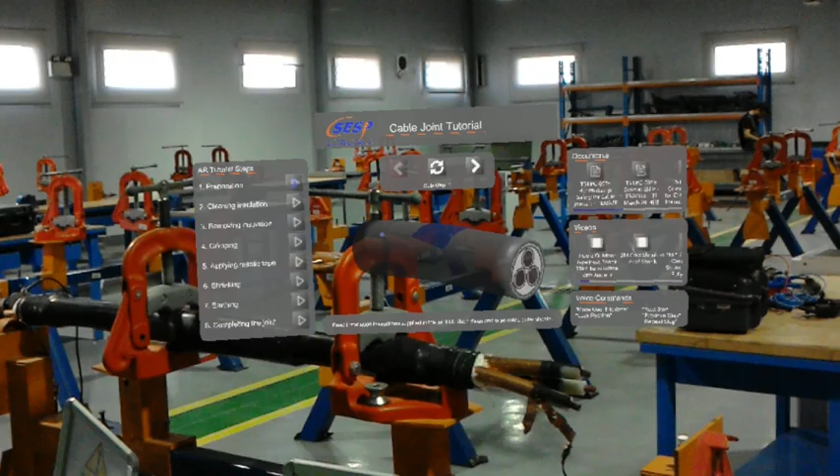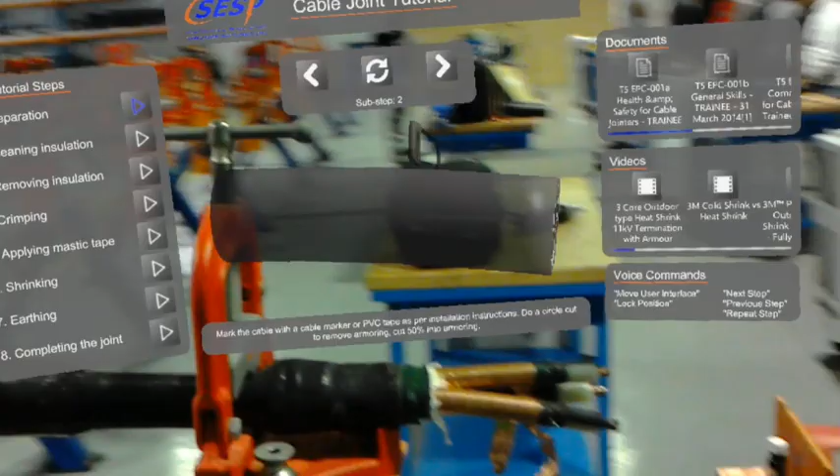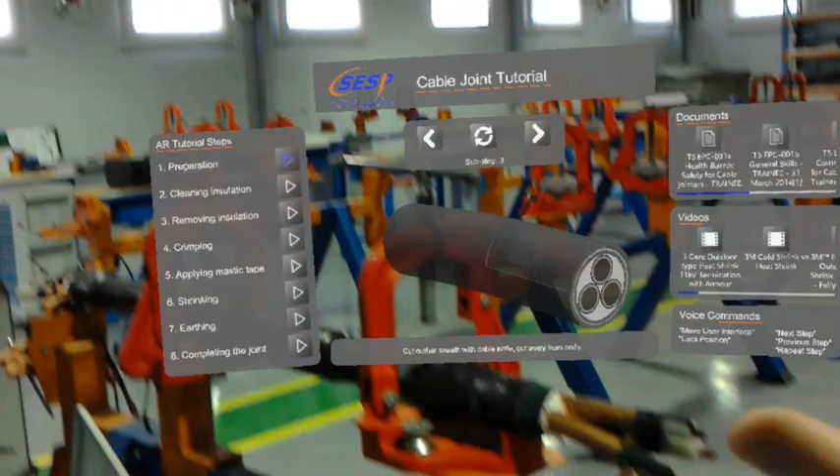Mark the cable with a cable marker or PVC tape as per installation instructions. Do a circle cut to remove armour. Cut outer sheath with cable knife, cut away from body. Remove outer sheath.

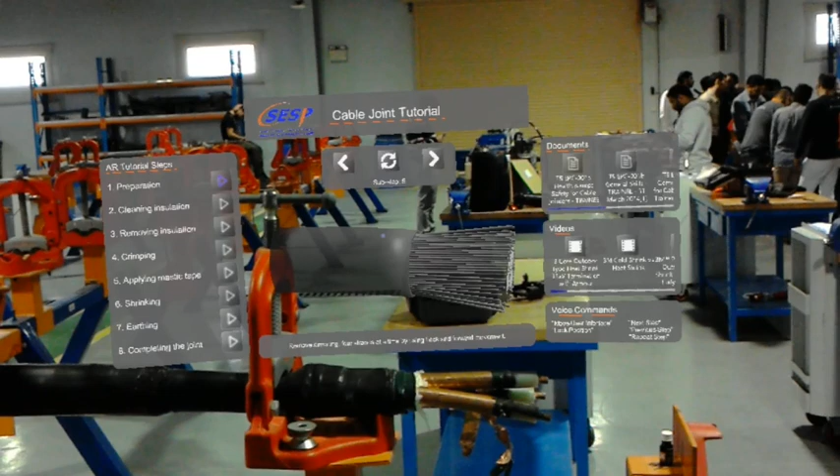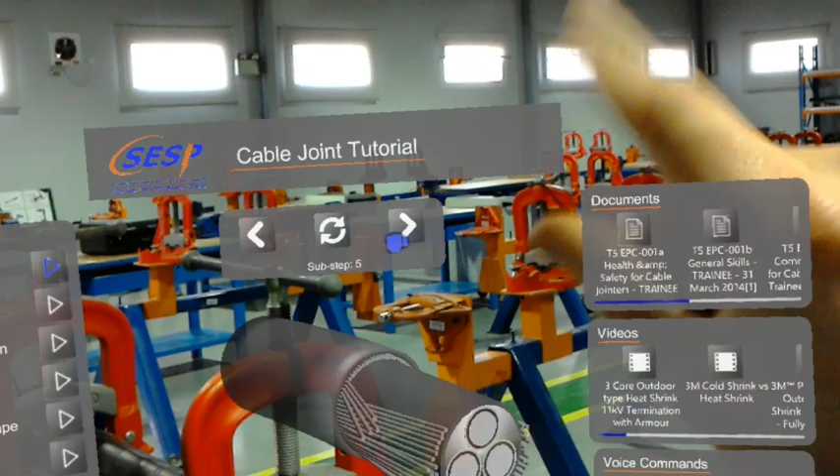Remove armoring, 4 strands at a time by using back and forward movement. According to instructions, mark bedding cutoff. Cut and remove bedding with a cable knife, don't cut too deep. Cut and remove inner bedding.

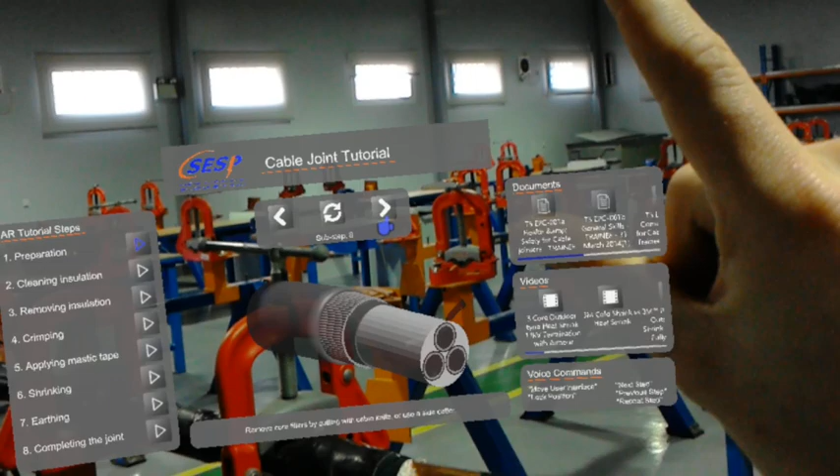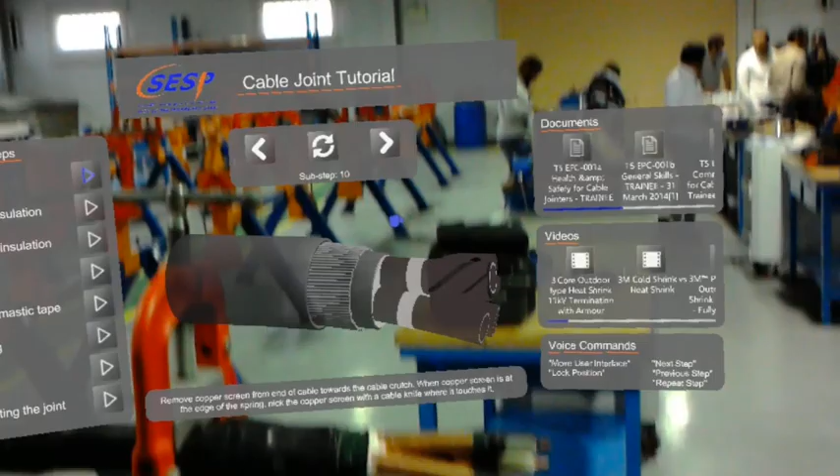Remove core fillers by cutting with cable knife, or use a side cutter. Read instructions and mark copper tape screen cut off. Place constant force spring on copper screen at the mark. Remove copper screen from end of cable towards the cable crutch.

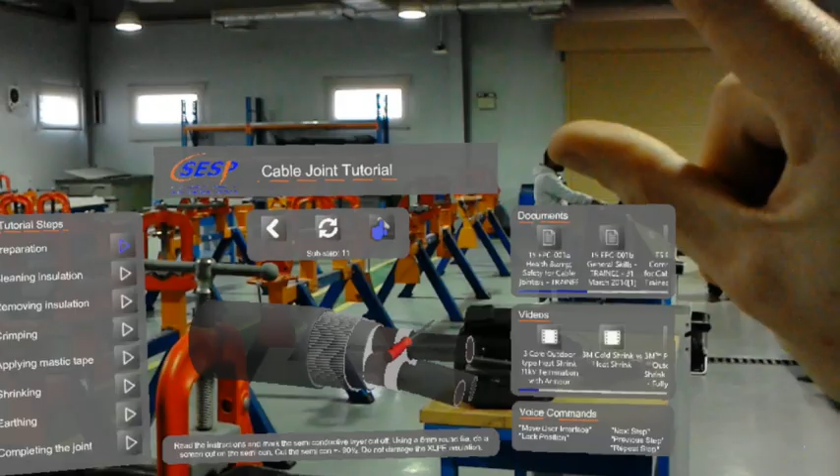When copper screen is at the edge of the spring, nick the copper screen with a cable knife where it touches it. Read the instructions and mark the semi-conductive layer cut off. Using a 6 mm round file, do a screen cut on the semicon. Cut the semicon plus or minus 90%. Remove the semicon by pulling it off, from the front to the back.

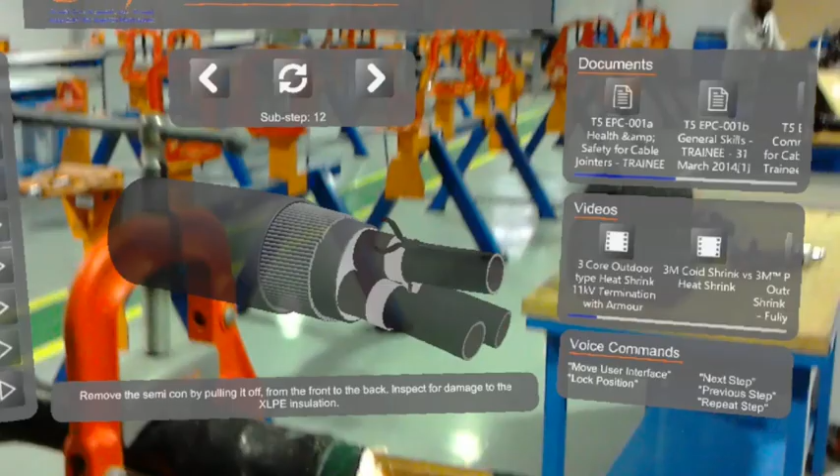Inspect for damage to the XLPE insulation. Place the cleaning cloth around the cable at the end of the conductor. In a circular motion moving towards the crutch, clean the cable. Do not use same cleaning cloth more than once.

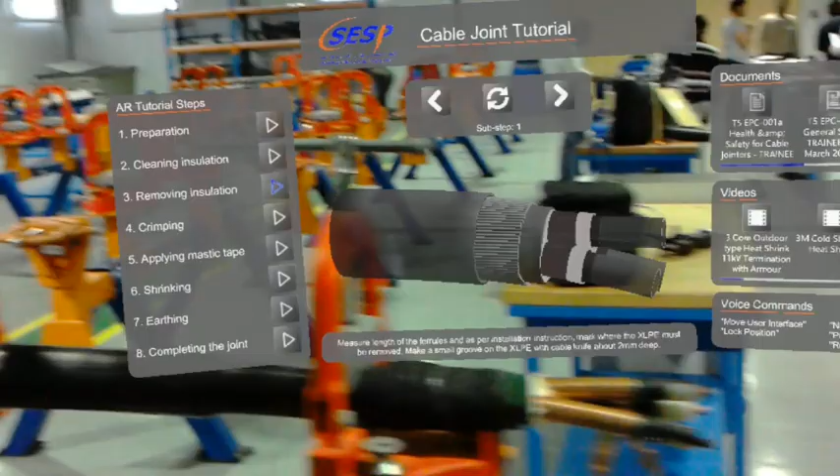Measure length of the ferrules and as per installation instruction, mark where the XLPE must be removed. Make a small groove on the XLPE with cable knife about 2 mm deep. Ring cut the XLPE insulation using a back and forward motion with the pliers. It will feel smooth once you cut through XLPE and also become black as you cut through the XLPE.

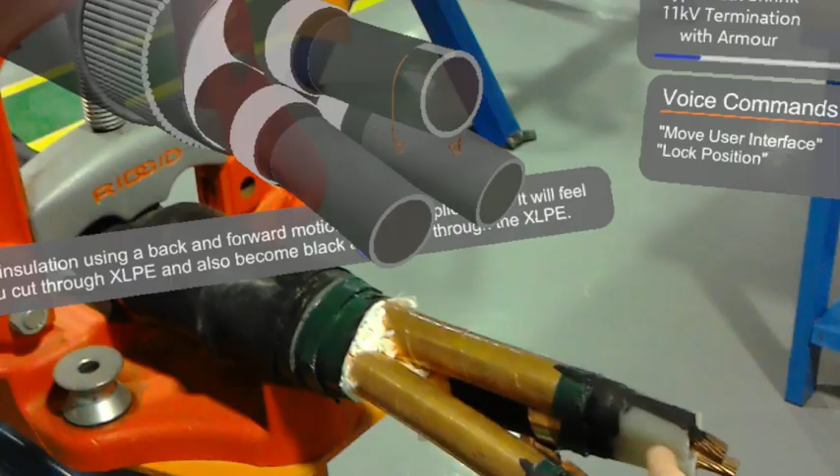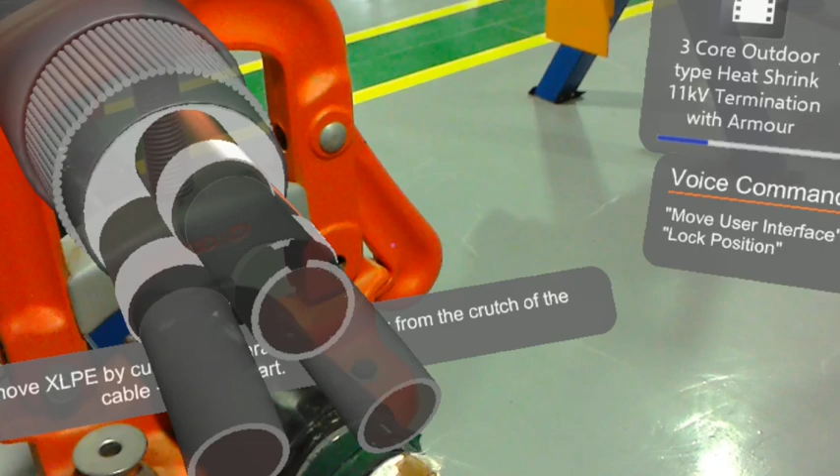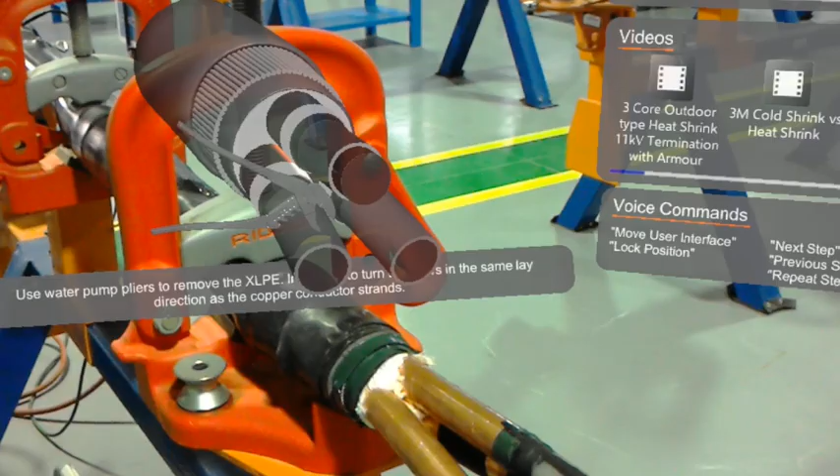Use Stanley knife to remove XLPE by cutting 2 parallel lines away from the crutch of the cable, 10 mm apart. Use water pump pliers to remove the XLPE. Important to turn the pliers in the same lay direction as the copper conductor strands.

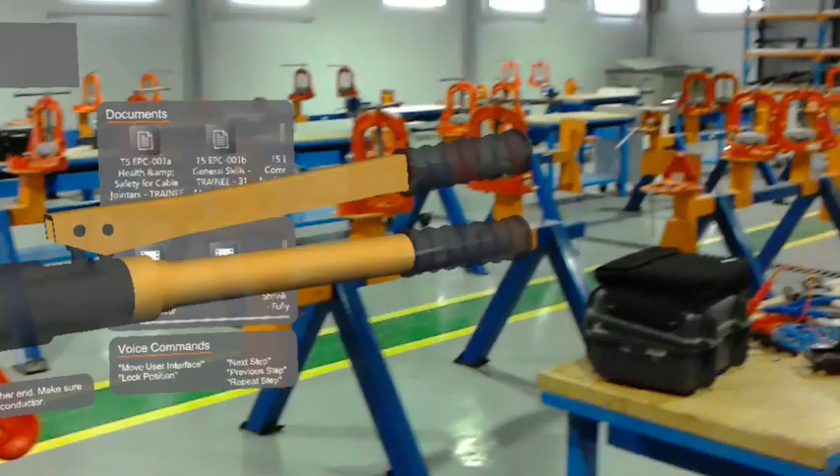Park all the heat shrink tubes on the long side of the cable joint according to the installation instruction. Place the ferrule over the conductor and ensure that copper conductor is exactly in the middle of the ferrule. Start the first crimp near the middle of the ferrule and second crimp to the other end. Make sure not to go too close to edge of the ferrule as it could damage copper conductor.

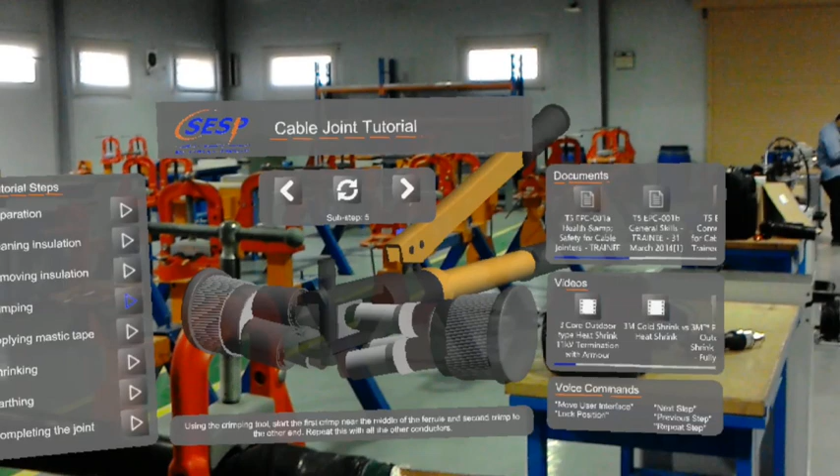Insert the corresponding conductor of the other cable into the ferrule. Using the crimping tool, start the first crimp near the middle of the ferrule and second crimp to the other end. Repeat this. Read the installation instructions to see how to apply the yellow mastic tape, void filler tape. Start by stretching the void filler tape by approximately 50% of its length.

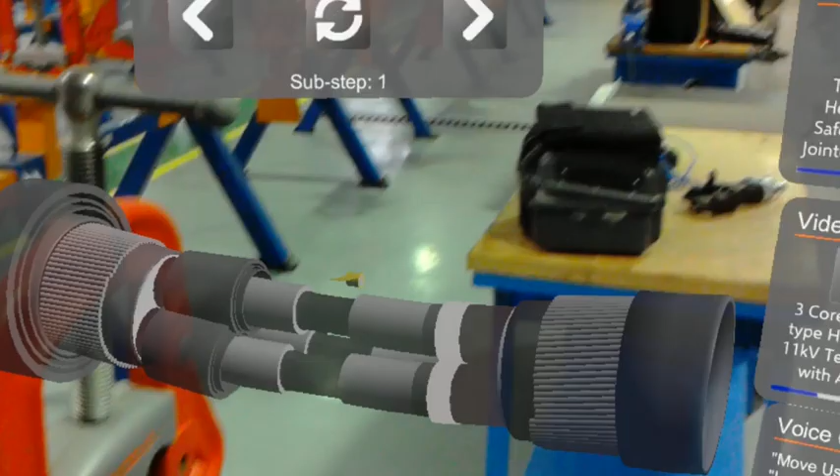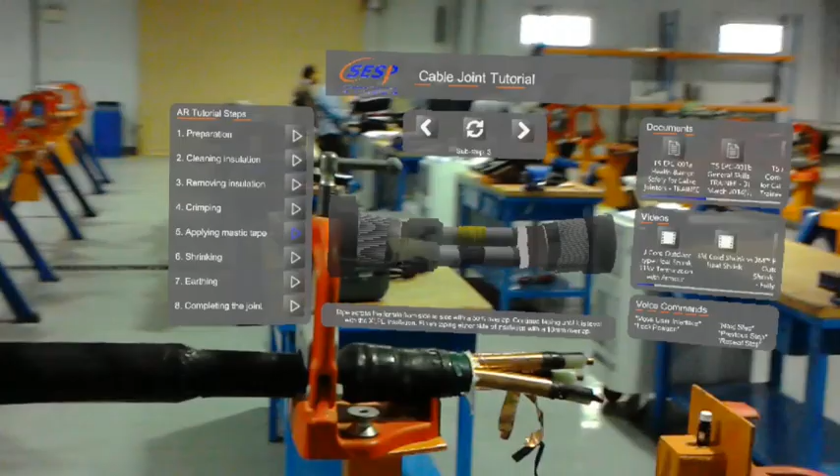Start taping in the gap between the crimped ferrule and the XLPE insulation. Fill in this gap with the yellow mastic tape, and build it up until it is the same thickness as the ferrule. Tape across the ferrule from side to side with a 50% overlap. Continue taping until it is level with the XLPE insulation. Finish taping either side of insulation with a 10 mm. Repeat on all conductors.

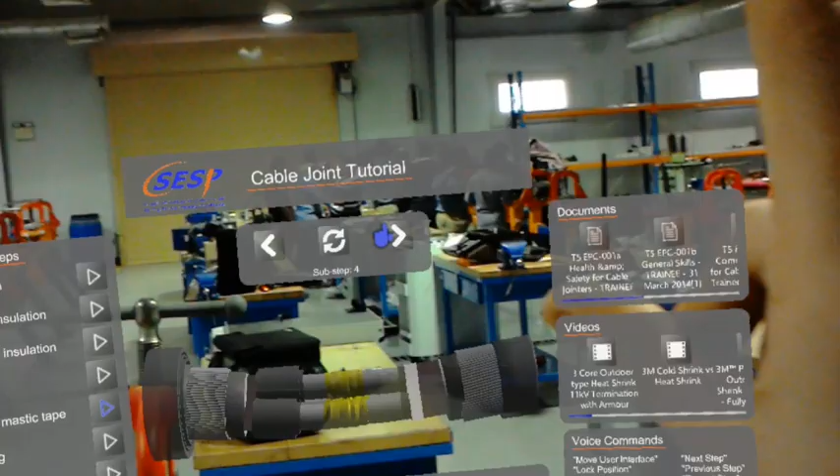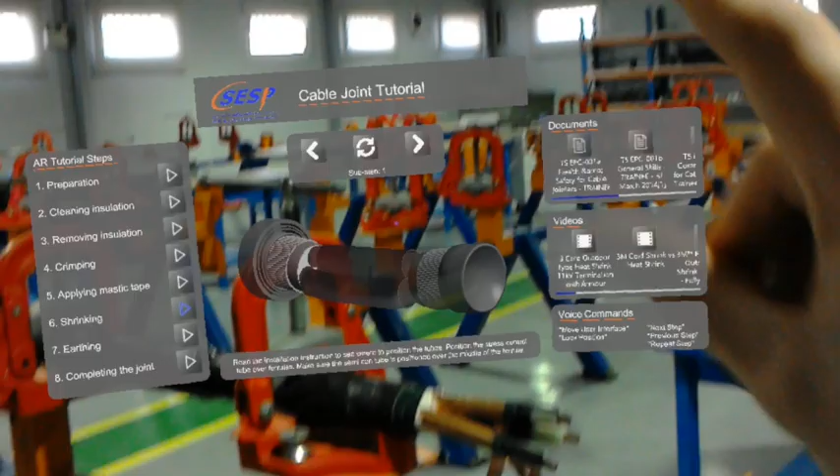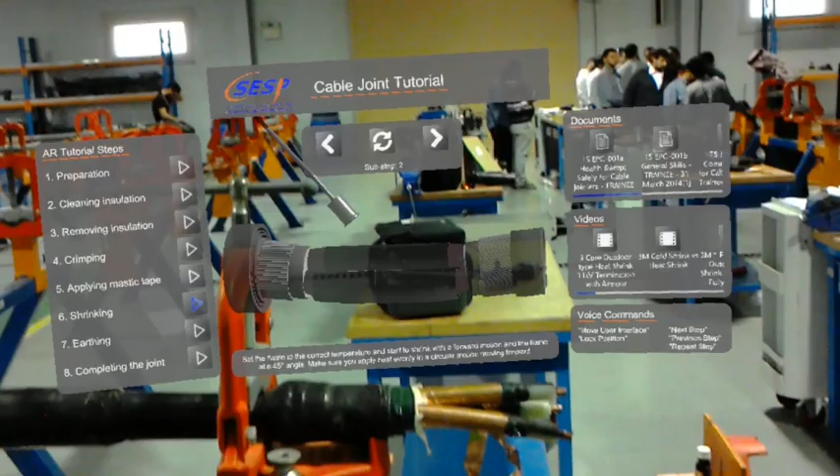Read the installation instruction to see where to position the tubes. Position the stress control tube over ferrules. Make sure the stress control tube is positioned over the middle of the ferrule. Set the flame to the correct temperature and start to shrink with a forward motion and the flame at a 45 degrees angle. Make sure you apply heat evenly in a circular motion moving forward.